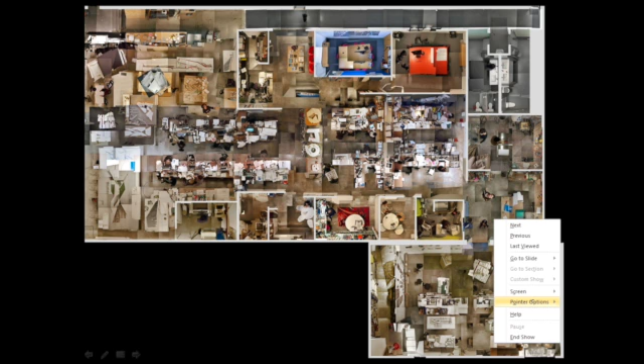This is a satellite photograph of the office. And the reason I show this image is because within the entire context of the office, housing exists thoroughly all through different parts of that office. It's completely intertwined. It's a major part of the work of the office.

And for the people in the office, including Teresa, who has been such a significant part of the ongoing work of the office, the office doesn't think about the work separately. We don't think of the work as a 'socially conscious' component, a term I've grown to hate because it makes it seem like all the other work we do is unconscionable. To us, it's all unequivocally and equally architecture.

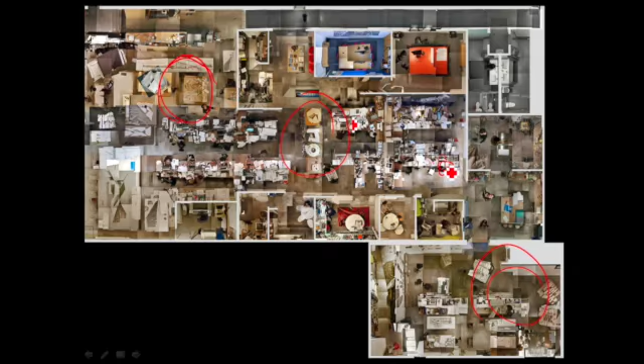This started in many ways with the first project for the office, which connected many of my original interests for architecture between education, arts, and most importantly, architecture's potential role in urbanism—in Los Angeles especially, where most people believe it is in many ways anti-urban.

This is a project for a school, Inner City Arts. You can see downtown here. This project, developed over many phases over the years, is first and foremost a nonprofit arts institution, a school that partners with LAUSD, the Unified School District, to take kids out of school as part of their normal school day and bring them to Skid Row to teach them art, because art has been taken out of most schools after Prop 13 passed in California.

This project, for me, was an important start to the office. Really, this was very much the first project. And it was important as well for context, not only for its program type—Skid Row District is an intense, inhospitable, relentless, and extremely unlikely place for architecture to exist.

In that way, I think one of the founding questions in the office and for myself was: could architecture exist in this context? And to challenge ourselves to see if architecture could in fact exist here. Because of the unlikeliness of this context, with few if any expectations on Skid Row—and this is an image of a street right around the corner from both Inner City Arts and the housing projects we've been doing—it felt possible to experiment, to push beyond the existing models for schools.

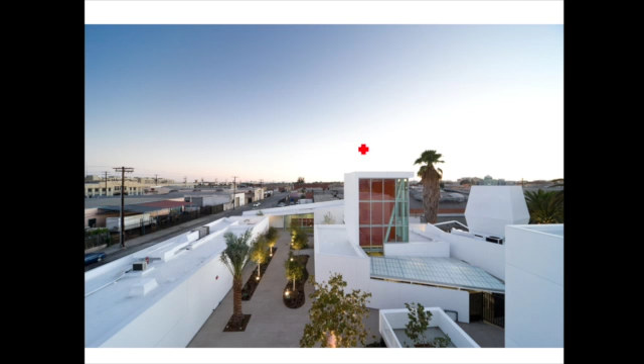The organization of the project is very much as the organization of a town. It tries to replicate many of the mechanisms of the city, the relationship between individual parts to a collective whole around a larger open space, trying to produce a sense of both individual identity and responsibility to the individual piece, but also a sense of responsibility to the collective whole.

In that way, architecture goes beyond an idea of pragmatism, but is very much meant to tell the story of how one might live in a more optimistic or progressive city. In that way, it is as much a teaching tool as it is an enclosure for the teaching.

The courtyard in that context is a new form, proposing really open, unprogrammed, but very much civic space between these different buildings. And these large roll-up doors open up, and the relationship between inside and outside becomes quite blurred.

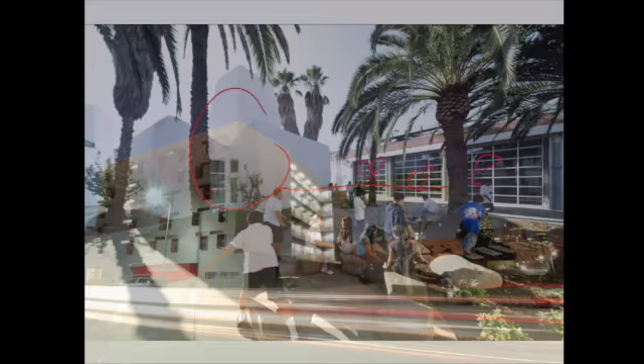Now, talking about the city during a housing lecture may seem a little bit off topic, but for me they're completely parallel. The entire reason we're invested in housing is because of its relationship and potential to transform and create real change in cities. And for me, the idea of the house and housing and its relationship to the city is inextricable.

Somebody who I've had a great deal of respect for, Yona Friedman, the utopian futurist thinker about architecture, wrote: 'When I was a schoolboy, I discovered that a house alone does not exist, that it does not end at the outer limits of the ground floor, but continues out onto the streets, the garden, then to the house across the street. The house across the street itself continues into what is in front of it, and so forth. To imagine one house is to imagine the whole world.' And by extension, I think, to imagine the city.

The first project we were involved in with the Housing Trust was Rainbow Apartments. That idea of the relationship between housing and the city was very much on my mind when we were contacted by them about 10 years ago, maybe 8 years ago. They were in the midst of evolving their model from an SRO type to permanent supportive housing, which was something they had never done before, and I had never done housing, so somehow they decided that was a perfect match.

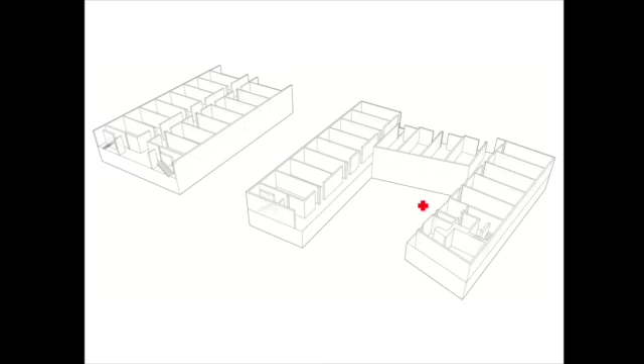But even more so, if there was invention in the project, it was at the scale of the collective of units. One of the biggest ambitions the Trust had for this project was to try to build a sense of community as a way of confronting and combating the isolation of many of the individuals that existed in the shelters.

This was something important we learned about the characteristics of the homeless in beginning to deal with this project: if you are homeless and on the streets so consistently, chronically, and in the public realm, constantly exposed and open in that city, you create this protective shell around yourself to produce some sense of yourself and some sense of protection from that world. Ironically, in a very intense way, the most public of those individuals became the most private in their psychological characteristics.

And for me that was important, because I'm not unrealistic about what architecture can do in the scheme of these very deep social and political problems. But I do think architecture can have real effect if it's targeted to specific problems that architecture can take on. One of them was to try to create a forum for reintroducing people to public interaction in a more safe or semi-public way.

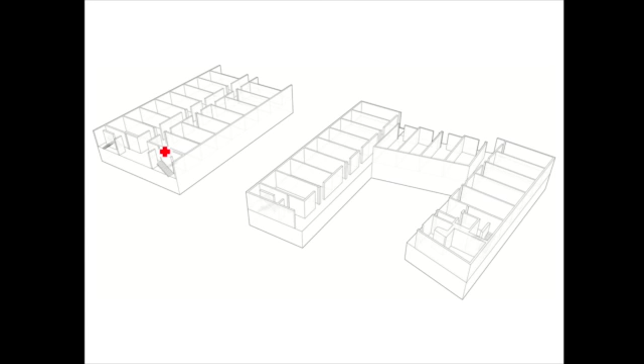That by itself is a spatial idea. The original model, the model of the SRO, was the double-loaded corridor, where people would come into the building, up the elevator, anonymously through the corridor and into their room, and you would never see them again. That model allowed people to continue to propagate this isolationism.

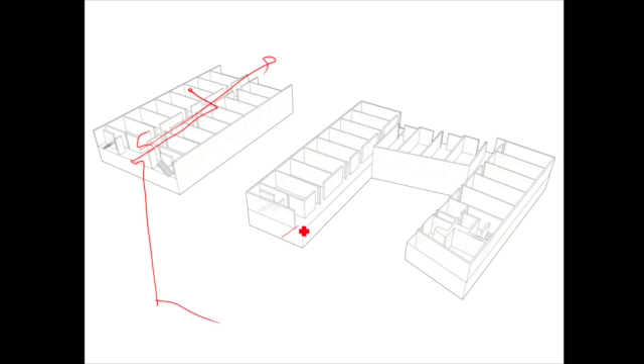What was at the core of what we were trying to do in Rainbow was to crack that model open, to create an interior space in which the tenants were in a sense forced into some level of more semi-public contact. We weren't going to dump people back out onto the street, but by cracking the box and creating a single-loaded corridor, people coming out of their unit just to go outside the building or to the kitchen would suddenly be in a space connected to this larger courtyard space.

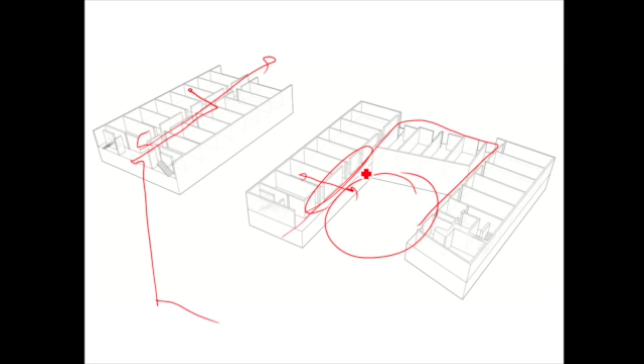That ongoing navigation and negotiation of this space for these individuals had the possibility to begin to give them the tools to navigate or renegotiate their relationship with what eventually is the outside world. That idea is a spatial idea.

It's very much an architectural idea. The project is organized as a 6-story building, very typical of the models of pretty much all of the projects we've done, because they have to be built with similar financial and funding mechanisms to typical developer housing in a place like Los Angeles: one floor of concrete podium, then 5 floors of stick-built or wood-built construction above. The podium became a real opportunity for us, and I'll talk about that in a minute.

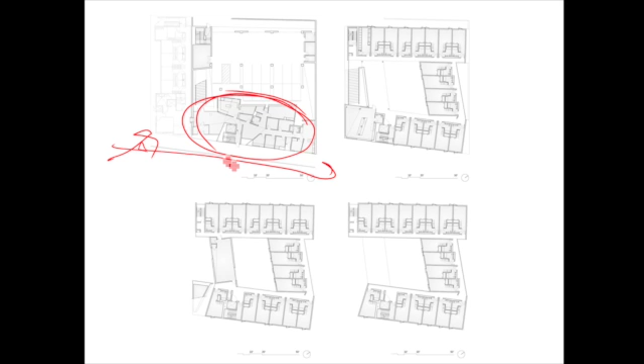In the first floor of the project, this is the main street, San Pedro. The front part of the project, which was the entry and then stairs up to the upper courtyard, had all of the social services in a series of offices very much on the front of the building. Unfortunately, because this building was still being built in Los Angeles, we had to provide an enormous amount of parking under that deck.

Once you came up the stairs to the courtyard, you began to be surrounded by the housing units that ran all the way up through, but there were important public or semi-public components organized around that courtyard. One was the laundry room right at the top of the stairs, which was the destination, the common democratic destination for everybody in the building.

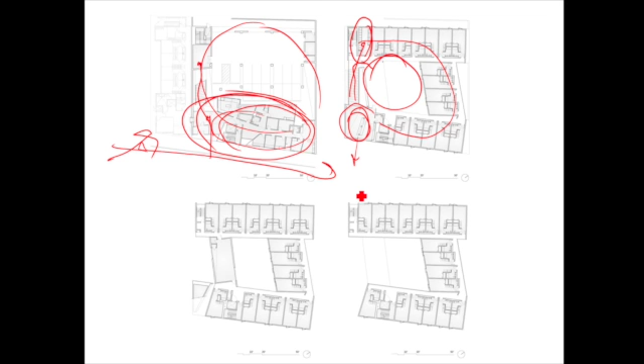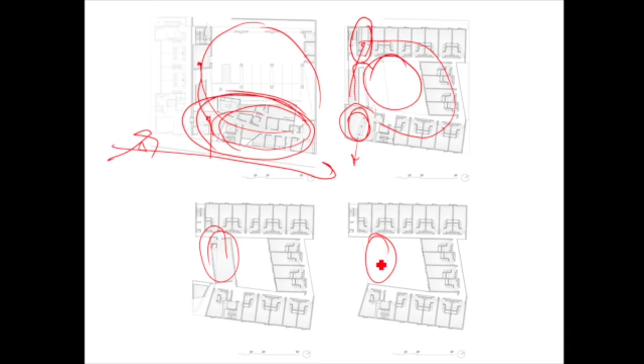The community kitchen was out on the other corner with views out over the street. And then on the next floor up, a bridge structure, which was the common meeting room for the community. That bridge up above had an outdoor deck where you could be even further up into the courtyard space.

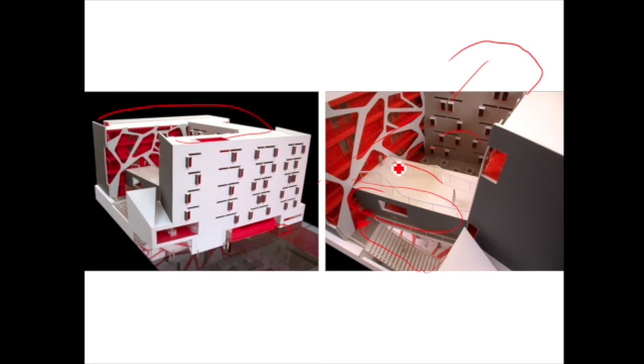You see the original models of the project: the outside space, the U-shape of the courtyard itself, the stairs up, the single-loaded corridor that then wraps around the back. Some of the units look into the courtyard, some look back to different directions, east and west in the city, and then the courtyard, the bridge structure up above, and that outdoor space on top of the bridge.

The laundry room was here as you came up the stairs, and the bridge, which spans across the whole courtyard, starts to create a shadier space underneath the building. But it's really about the linkage or pivot of those different social spaces that was important to me.

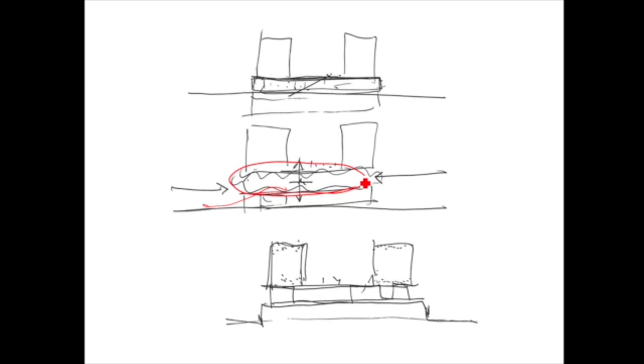I mentioned that all of these buildings are on one floor of podium, and that's something that became characteristic in all of the buildings: how do you navigate up through the building to this new semi-public space? It's not on the ground floor, it's not all the way at the top, but it's really that first level up. It's a space that is not far from the street, but is connected more to this interior space of the courtyard.

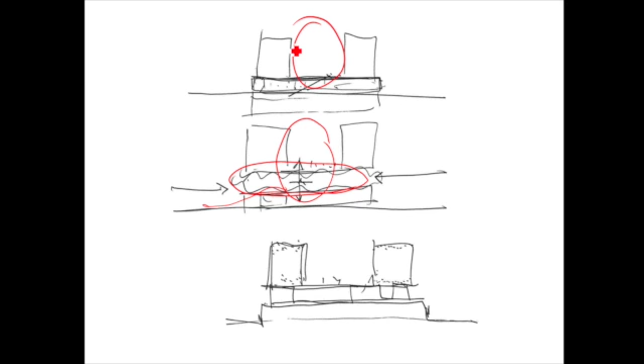The way that space has evolved in all of the projects I'll show tonight is probably one of the places where the greatest amount of exploration and hopefully invention has taken place. The outdoor courtyard space has very much been taken over by the community.

It's not just a place to see across and to see the other individuals in that community, but has been embraced very much as a social space, a party space, a lecture space, a barbecue space, and increasingly a garden space.

The courtyard, which was very much a hardscape for obvious financial reasons, has increasingly been filled in by a series of large-scale planter boxes that have been retrofitted into the building, in which the community begins to grow. The idea being that that space is the heart of this community.

Each of the units is absolutely identical, and this was part of the program. There was a sense that while there would be a collective space, one of the other parts of this, the democratization of this community, would be that every unit was exactly the same. The only difference really being the window placements, which begin to shift back and forth, creating a sense not only of difference in the unit, but also very much a level of individuality on the exterior facade.

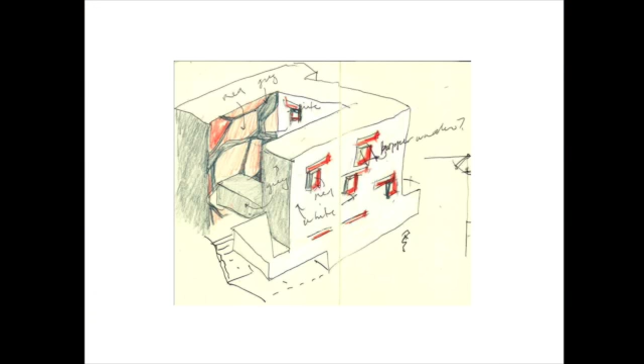I mentioned the courtyard and the financial issues on the courtyard, and the reality is that financial issues of any architectural project begin to have enormous impact within these projects, and this project was no different. One of the issues was that this project was designed, and because of the funding mechanisms, had to be completely budgeted very early on, even well before we were finished with complete design.

And the problem was that over time the economy took off. It was one of the periods of greatest run-up in the economy. So while we budgeted and funded the project in one economy, construction prices continued to go crazy. The inflation was intense, and you couldn't keep up with it in any architectural project. It was almost like we designed the project in one economy and then tried to build it in a completely different economy. Because of that, and because the costs and prices of building materials were changing all the way through the process, it was a construction process of constant value engineering.

Value engineering, or really taking things out of the building. One of the things that got lost was a series of screens that created some level of separation between those walkways and the courtyard, some level of intimacy, but also a scale of screen that was both at the scale of the individual and the courtyard. It was trying to be that in-between facade, really a communal or civic or city-scaled facade that we weren't able to hold on to in the project.

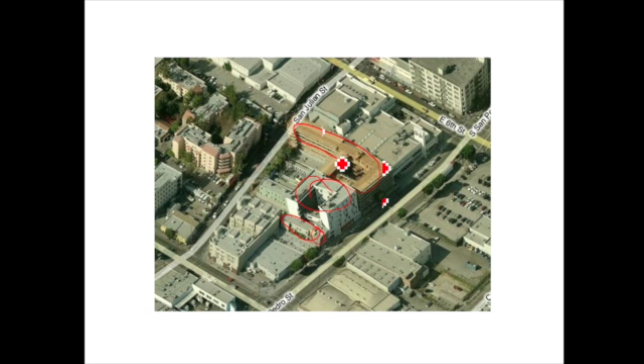There were, as I mentioned, Skid Row had built another project here. After Rainbow, and this is the only Google image I could find, this project is now done, which was the Abbey Apartments by Koning Eizenberg, all built in a row, and then there are other social services, the Midnight Mission Drop-In Center. One of the things that I began to realize, and I think was very much on Skid Row's mind, was that their success could potentially be their urban downfall.

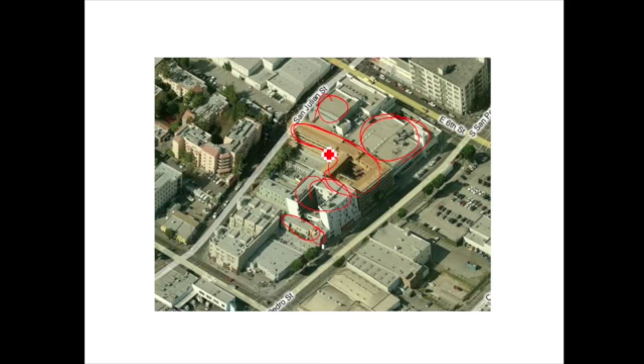That by creating so many successful projects, by propagating a density of these kinds of housing projects, that they were in danger of recreating the monoculture of the large, enormous projects that I showed earlier on that were built in the post-war period. That any individual project could be seen as quite successful and intimate, but taken as a whole, you're completely changing the dynamic of the neighborhood.

Because of that, Skid Row began to look for the possibility of moving their project to other parts of the city, to expand this question of where affordable housing, housing for the homeless, should be in other parts of the city. They found a site that nobody else wanted, next to the 10 freeway, proximate to downtown, but also extremely proximate to the convention center, Staples Center where the Lakers play, and now this large entertainment development called LA Live.

This project for Carver was a little bit larger. It's 98 units with an emphasis more on elderly, formerly homeless elderly individuals. It was an incredibly challenging site, very small for 98 units. In fact, it seemed like it was going to be impossible to fit those units in. It was oddly shaped, kind of a half or a quarter crescent shape.

But the biggest issue was the proximity to the highway. It created enormous problems of acoustics, especially for tenants immediately adjacent to the highway. The quality of the air could potentially be a problem. And in some ways, the visibility of the project was very much a question as well.

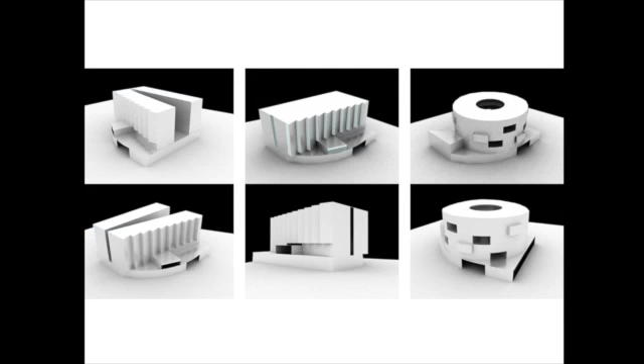I learned a lot from Rainbow, as I mentioned. Some of it was just in the approach to the way that you would begin to strategize and think about the project.

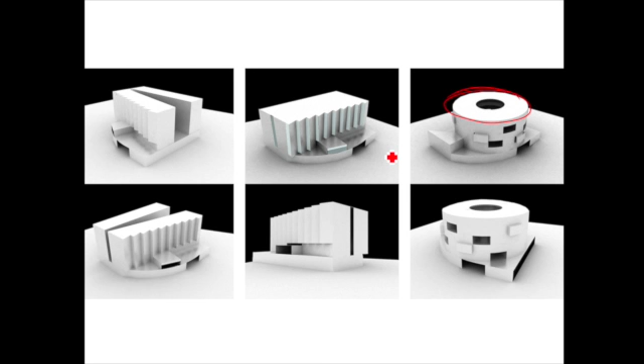As I mentioned, the site was quite unusual, and we tried many different configurations before settling on this circular form for the project, which was a lot unusual for a housing project, but it had some very strong attributes. What we realized was that the circular form provided the maximum amount of floor area to the minimal amount of circumference, and since we're always dealing with the cost of surface area in relationship to floor area, that was an interesting beginning to the project.

The second thing was that it created the smallest amount of surface area in proximity to the highway and the noise generation. The physical properties of acoustics mean that every foot you get away from the noise source, you get a significant drop in the decibel level. That was important because we knew the cost of trying to mitigate the acoustics was going to be an enormous cost of the entire project.

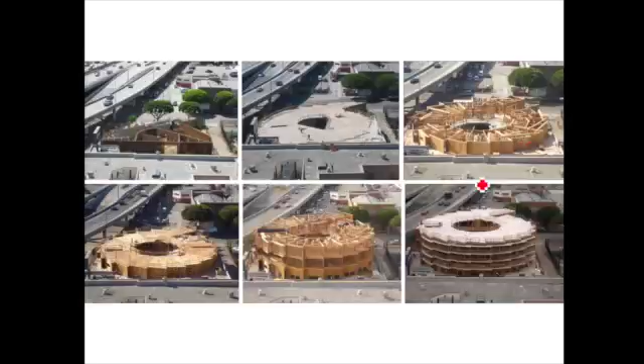This just gives you a sense of the construction as it started to move up, the stick building of the building, the circular form of the project, the interior courtyard that was the result of that, the donut at the middle of the space, and the lower level, which I'll talk about.

One of the other characteristics of the project was that this round shape made the building start to feel like it was in motion as well. Given that so much of people's apprehension of this project was going to be in motion from passing cars, I was fascinated by the idea that the building could be in a kind of choreographed dance with those people as they drove by. That was one way of beginning to capture some sense of relationship—that if the building felt like it was in motion with you visually as you moved around it, you couldn't help but feel like you were in some kind of romantic dance with the building and the inhabitants in the dance.

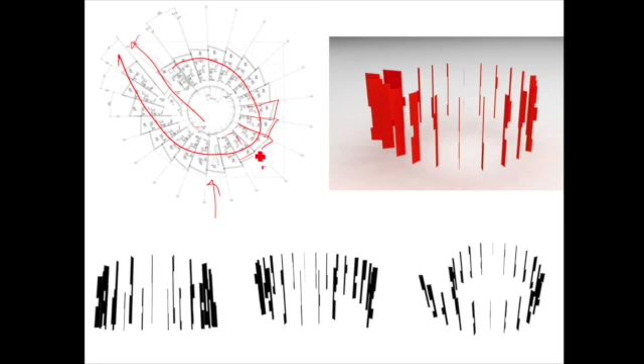We did many different studies of the way we would create a type of staccato nature. You can see in the plan that the form begins to fan out. It allowed for some openings in the building, but this slightly serrated facade also had great advantages in terms of actually building the building—it was a series of straight segments. It had added advantages acoustically, but it also began to create small indications of the individual unit within the collective facade. That idea of the individual in relationship to the larger whole has been an exploration both in the form and the facades of all of our work.

And here it is going by. It's going to happen a few times, so hopefully you get it. That's about as fast as you ever go by—very often people are in a more ongoing relationship with each other because they're not moving so quickly.

The ground floor is very different in its form and plan from the rest of the building, the tenant floors, the apartment floors. Here I was trying to create a space, or a series of spaces, that could almost be seen, both from inside and outside, as an extension of one of the characteristics of this place, which is the underneath of the highway.

While the highway up above defines very much the upper circular form of the building, I'm just as fascinated by the underneath of the highway. It's a kind of space which tends to be unused, but is also very characteristic of Los Angeles, and increasingly, I think, needs to be one of the characteristics of infrastructure that begins to change. This project aspired not necessarily to revamp that space—that was outside our scope—but maybe to give indications of the way something at the scale of infrastructure could relate to something at the scale of a unit of the city, whether housing or any other project type.

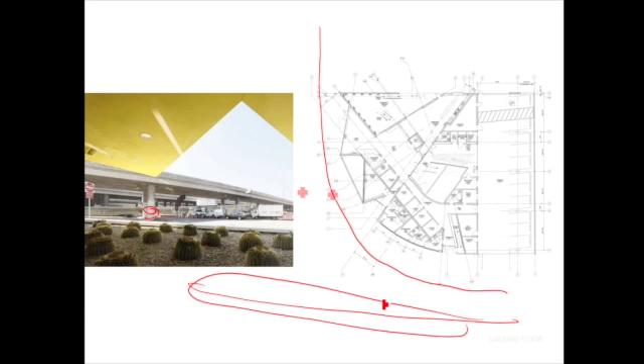Hope Street comes along and bends in this direction. The highway is right here, and underneath the highway is right here. This view on the left is taken from the community room out towards the highway.

But there's a series of almost boulevards or avenues, spatial extensions that connect the alley to all of these streets visually, as well as being accessible physically. So while the building very often isn't open, it's a secure building, there's a sense that as you move through these spaces, which also include the community rooms, the community kitchen, the main office, this meeting room, and resident managers' apartments, you're constantly given a sense of visual trajectories deep into the city.

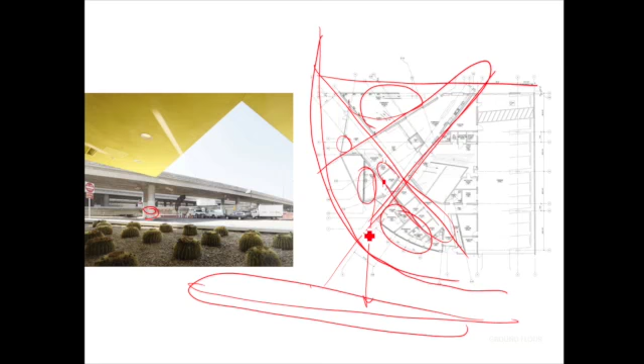So from that ground floor, there's a sense that the building is very much connected with continuity to the underneath of the highway, the continuity of Hope Street, all the way out to the alley, and the extension of Hope Street on this side.

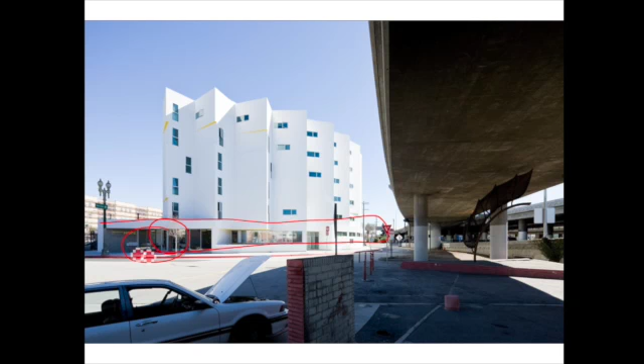The building, which you saw from above, from the highway, is also meant to be seen from this lower space. That extension visually where you see the entry, that entire concrete side of the building is at this level. You can begin to get a sense here that the highway, which very much right now divides two sides of the city, has the potential to actually connect two sides of the city.

I think buildings like this, and siting buildings like this, with this kind of visibility, have also the role of indicating that these thresholds or seams that have tended to divide the city are also very visible. In the same way that the community that exists in this building was once anonymous and now is much more visible, these urban conditions need to be made significantly more visible as well.

In the inside of the building, the inner courtyard is a very important space, as it was in Rainbow, but in this case it's much smaller. The scale of the space is much tighter, although events do often happen here.

From the lobby, there's a large staircase at the center of this internal courtyard, and its intention is not just to take you up to the primary second floor, but is also meant to be a place to be, a place to sit, a place to have conversations, a small amphitheater for the community to meet when there are meetings about what's going on in the building as a whole.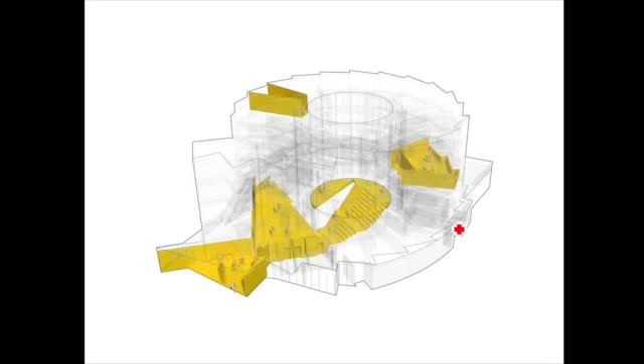In that way, it's not a flat courtyard, but a stepped and very much occupiable series of stairs. As opposed to Rainbow, where most of the social services were all on one floor, here I was trying to change that model and begin to spiral those different spaces up through the building, so that the section of the building drew people up through into the individual units.

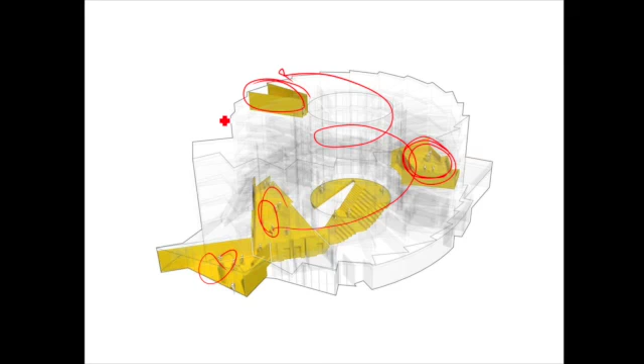So it was an experiment to see if these social spaces - the community kitchen, the entry, the laundry room, the meeting and TV room, the smoking porch out towards the city - were opportunities to quite literally draw individuals up through the building, as opposed to allowing or hoping that semi-public space would work by having it all on one floor.

The inside of the courtyard, as I mentioned, was quite tight. One of the things we learned from Rainbow, and when we lost the screen on the inside of the courtyard, was that these elements have to be more fundamental to the building. One of the ways of doing that is that no individual architectural unit can only do one thing.

No individual architectural component can be a monoculture in and of itself. It has to do multiple duty.

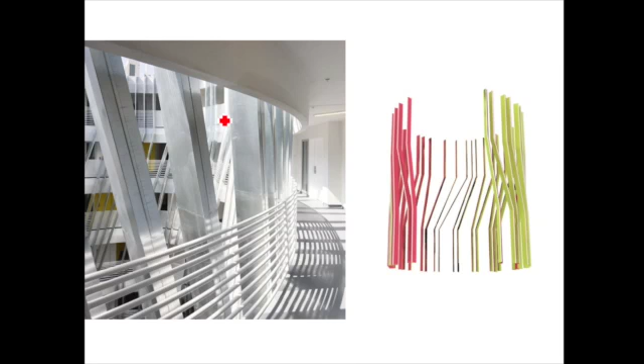I was very concerned because of the tightness of the courtyard that the visibility across would be too exposing for the community. So what we started to do was imagine a series of vertical fins, almost like the blinders that a horse wears, where you can see directly across. As you move around circularly around the courtyard, the farthest dimension is always the thing that's very visible, but as you look through your peripheral vision, it becomes more closed and opaque. So it has an inverse relationship to that movement.

But the fins have to do a number of other things - they become primary structure for the balconies.

We're hanging all of these balconies off of tension rods that are inside these fin enclosures, which is a very efficient way to hang the balconies.

Secondly, all of the roof drains migrated out to this interior perimeter, so they drop down through the building. There was also some methane on the site, typical in Los Angeles, which needed a series of methane vents up through the building. By pulling them into the courtyard, we didn't have to navigate them up through the walls of the units, which is very expensive and a problem.

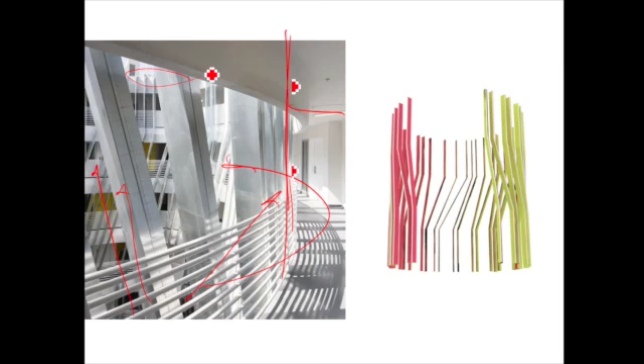It also gave us a way of starting to create a very pragmatic texture on the building, and cladding all of those necessary items became a way of reinforcing the architecture and its use in terms of the social and visual dynamic inside the building.

Here you see that interior space and the fins in the building. There are two primary stairs here and here, which are open to the outside, so as you move up through the building you're really in a way outside of it. The elevators are here as well.

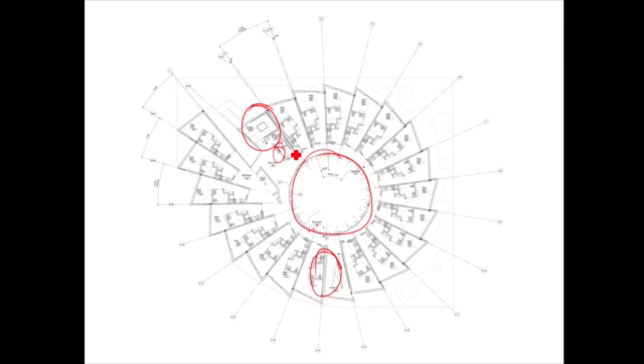These are images of the units. The units changed quite significantly. Is that in focus? Can you see that? It seems a little off, maybe up there.

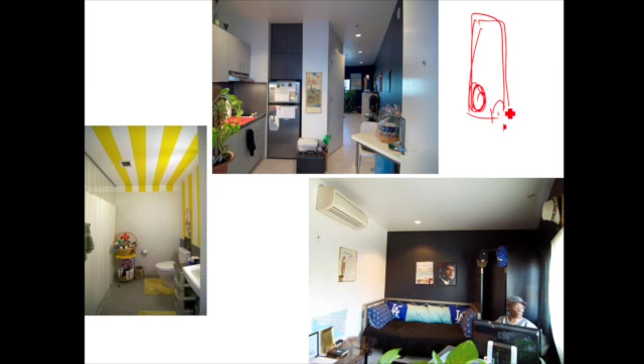We changed these units quite a bit from Rainbow. In Rainbow, it was a unit with the small kitchen and bathroom all at one end, and you entered directly into the space of the unit itself. At Carver, they're quite different, where the bathroom migrates to the middle of that space and the kitchen is in the front.

That did a couple of things. It allowed us to create a much larger facade, which meant we could get a window and a door on both sides of the unit for flow-through ventilation. It also meant the kitchens were right off of that courtyard, so as people were working in their kitchens, they were part of that social space just outside their window.

You can see the kitchen here, the bathroom entered through here, and then the efficiency unit, which includes a table and chair, a bed, and a lounge chair. This is one of the tenants' bathrooms.

Everybody, because it is permanent housing, very much transforms their unit. Some of them have serious decorating skills. Some of them have a different sense of how they decorate their units.

An important part of the courtyard was also to frame this idea of the vertical, to use it as a real attribute. That interior space creates a space away from the intense acoustic environment of the highway, but it also begins to give you a sense of vertical expansion, so that in that collective space, the sense of openness and extension toward the sky is part of the optimism and identity of the building.

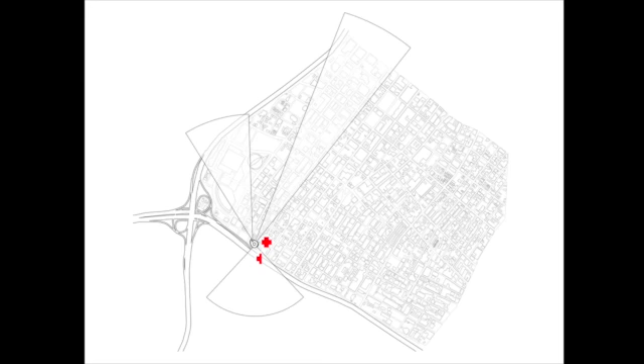I mentioned those individual spaces that spiral up through the building, and that the building acts as a kind of compass. The community room and laundry room were grouped together for the first time, so those two activities could really merge.

That space is at the third floor of the building, which puts it directly at the same level as the highway. It is the Carver Apartments' front porch to this larger social space of the city.

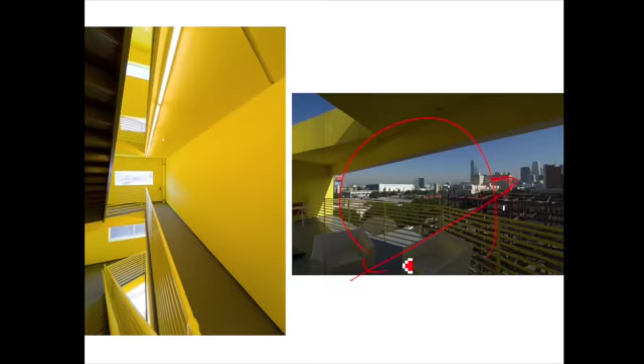As you move up through the stairs, you connect to other spaces, including this larger porch, which has a phenomenal view of downtown. To make downtown and its iconography a partner with the building, we were trying to find, in any place we could, even the most incidental of spaces, ways of creating useful and social space for the community as well.

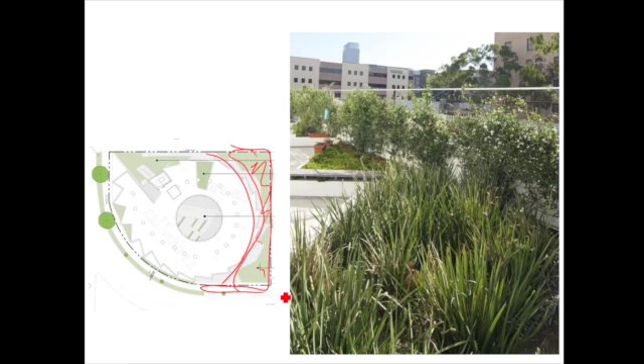As I mentioned before, if this project is going to have an influence on urban thinking, it's partially in the way it engages the city in and of itself, but also has to begin to deal with, or has the possibility of dealing with, the idea of infrastructure as something so defining in the city.

While this hasn't completely come to fruition, one of our ways of thinking about this is to begin to ask what it would take to use not so much Skid Row as the organizing district for these kinds of projects, but to take on other more characteristic components of the city, like infrastructure, like the highway, and look for sites that other businesses, individuals, and developers wouldn't necessarily look for. Because of the inventive quality of these projects, you could imagine them as real places to build housing in an ongoing way, transforming one of those important urbanistic characteristics of the city.

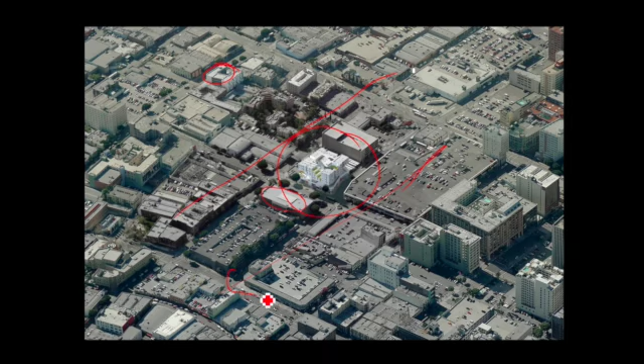There were a number of new challenges posed by Star that are different than Rainbow and Carver. One of the things the Housing Trust was very much looking at, in conversation with us, was how to take this problem of creating these projects as more individual or siloized, and connect them to a broader, more ongoing and sustainable idea of the city.

One of the ways of doing that was to potentially create a project that would be mixed use, adding other components beyond just housing. The Housing Trust was very interested in potentially doing a retail project. But there's a problem with that, primarily to do with their funding—if you're in the housing business, you're not really supposed to be in the retail business, and it starts to create a series of impediments for funding.

But there is—and I'm paraphrasing the way they've gone about it, they'd probably not be happy with how I'm describing it—a loophole that exists in some of the housing codes, which says that if you have an existing retail use on the site, you can keep that retail use going. So the Housing Trust went out and started to look for full-site retail buildings.

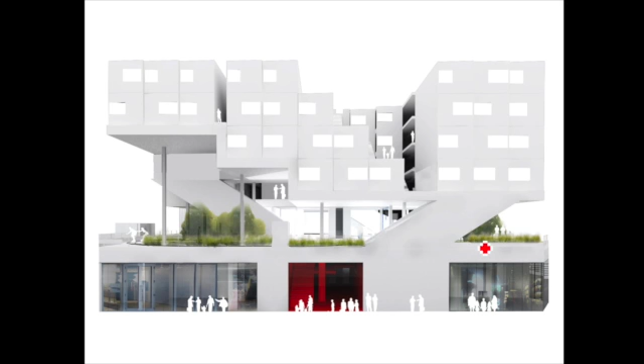I can't describe what a radical idea that is in a city like Los Angeles, as it would be in many emerging or contemporary cities—the idea that you would value a building just because it exists, and try to transform that building and put effort into transforming it. It's interesting because it's saying that density as an emerging reality in Los Angeles is an important characteristic of thinking about the development of the city and these projects, as opposed to removing existing density, to begin to work with that and enhance it.

The reality is that by working with this existing building, it presents a series of pragmatic challenges, which include having to keep the retail businesses open for as long as possible and not interfere with them as much as possible. And because the building occupies the entire footprint, staging the construction is also a very complex problem.

We began to look at what other possibilities existed in thinking about building the building, and we got very interested in multifamily prefabrication as a way of thinking about this project. That also is a new idea.

In Los Angeles County, while you're able to do prefabrication for single-family houses, where it's arguable whether it's really of economic use, you're not allowed to do multifamily prefabrication. It's a bit arcane, but it primarily has to do with the fact that a prefabricated unit used in multiple instances is considered a product. Any product that is part of a building in Los Angeles has to have a research report, which is our equivalent of a UL listing. And none of the prefabrication companies want to go through the process of listing their buildings for an unknown building climate or potential constituency.

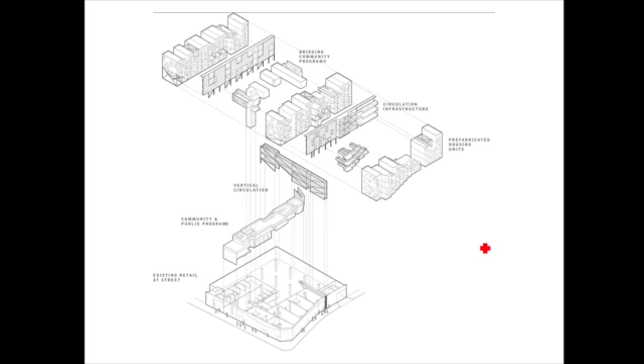So another part of our project was to work with multiple prefabrication fabricators to actually design their brochures so that these units were included in their brochures. The thoroughness of having to take these iterative steps was very much part of what we've come to believe architecture is—not only a building discipline, but a strategic discipline.

This is the way the project will be built. The deck that exists is remaining—we're going to use that, but we're actually suspending a new concrete deck above it, which spans the entire site, becoming a tray for the prefabrication to drop on top of. This has to do with structural reasons, because we're in a seismic zone, and dealing with the prefabricated unit and collecting the forces and dragging them down to the ground is another one of the complexities.

These are stacking diagrams—they stack 4 units a day. What's interesting is the advantage in the prefabrication: it allows for the staging, and it allows the businesses to stay open for an extraordinary period of time. We're really missing the majority of their retail units by needling the structure down through. It doesn't mean it won't be loud, but we'll be missing their actual units.

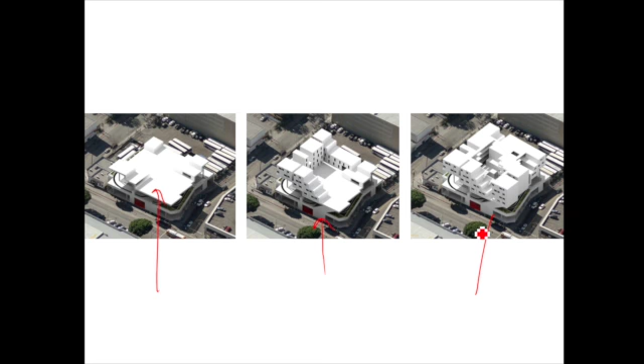The prefabricated model allows for these projects, the units, to be built in a factory, which means the quality control is much higher, which means the trust as well as the individuals will have units that last and be maintenance-free much longer. That kind of cost is something we're just beginning to quantify, but it's something that will be quantified over the life cycle of the project.

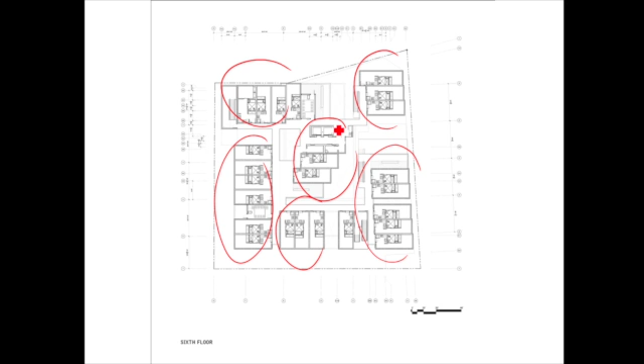Each of those stacks of units begin to be stacked into smaller, almost building-like clusters, so the units are not just around the perimeter but all the way through the full site, and these individual clusters act like small buildings in a larger village. It has the advantage of creating a series of views and light and air deeply into the block, and means we can use the entire block efficiently without going beyond 5 or 6 stories, which is economical in these kinds of buildings.

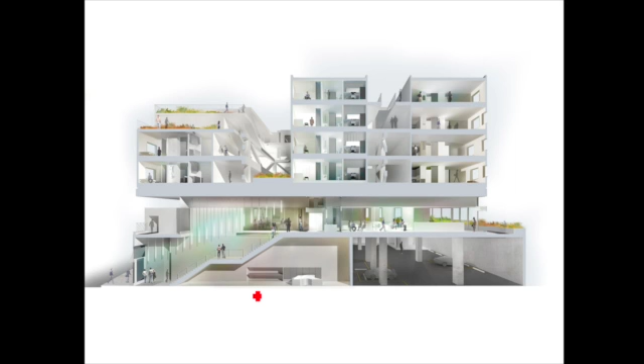This project is also changing the model significantly for the trust, because in the past the social services were really only for the tenants in the building. In this building, they're looking at expanding the social services so there'll be service providers for other buildings that don't have social services in the neighborhood, so this starts to become more of a center of a much larger community. Most of those services are on the ground floor and a mezzanine floor.

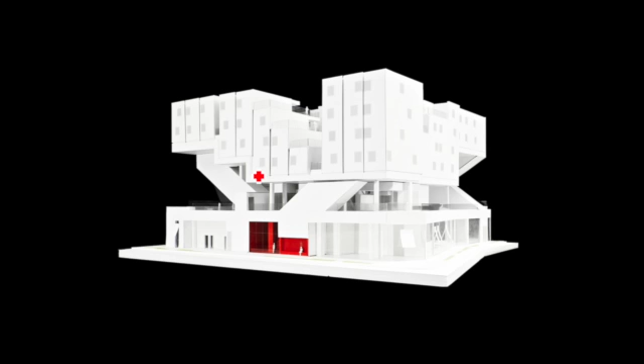Here you see some of the parking behind, because in this case we do need it for retail. The units up above, and then this in-between space. That in-between space, created horizontally between the existing building and the new units, is for us in this project the equivalent of what the courtyard was before. Not a vertical space so much, but now a horizontal space that connects, because you're raised up a bit, out to the city as a whole.

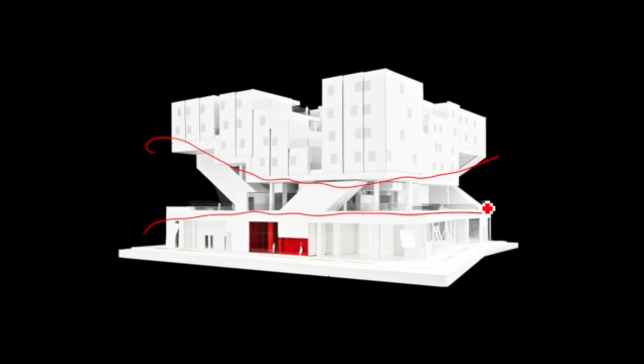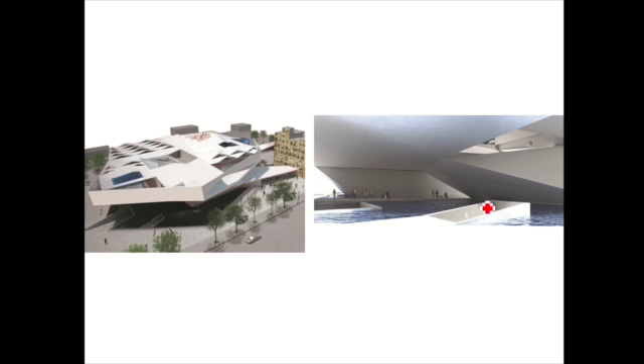In the first project I showed, Rainbow Apartments, the courtyard was a more enclosed space, more removed from the city. In this project, you are both removed in a pragmatic way, but in a more consequential relationship with the city around it. And this has a little bit to do with some of the thinking about making public and semi-public social space in cities like Los Angeles.

In this case, a project for a museum in Fresno had similar characteristics, where the city is not mass dense, or doesn't have the same kind of mass density you might expect in a city like New York, or even to a certain extent Boston, Chicago, Paris, London, but is a type of city which is much more open, much more porous.

In this project, we were trying to create the public plaza by creating the kind of compression that you normally have in a courtyard vertically as opposed to horizontally.

We've explored that in a number of installations, including one called The Dark Side of the Moon at SCI-Arc, which took these two surfaces and explored what kind of connected or communal space could be created for events in between. This was an early diagram I was doing where this model doesn't really exist.

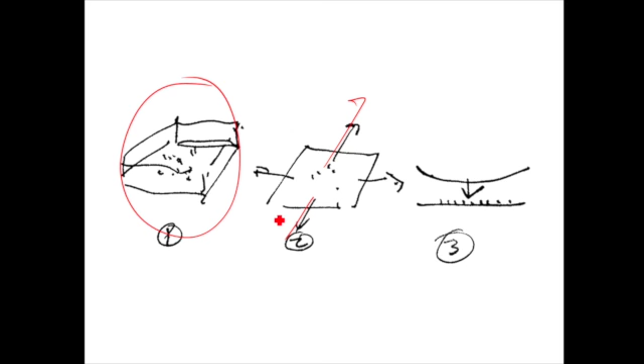This model of creating those spaces doesn't exist in a place like Los Angeles, where the compression that normally exists begins to peter out from the perimeter. And maybe this model is one that could be looked at in a building.

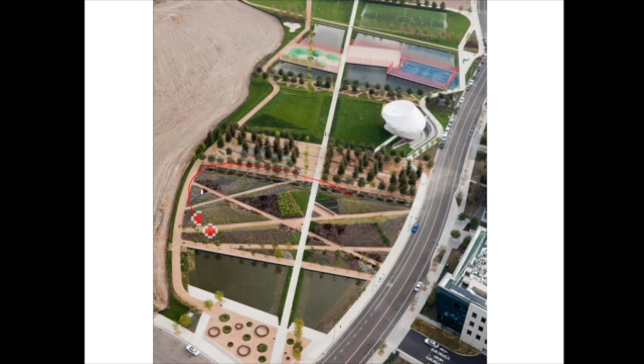Another project that has been a real influence on that in-between space at the Star Apartments is Playa Vista Park, which we just recently finished, which is our first landscape project. Here we were trying to recreate in a park space by developing a series of specific activity spaces, activity bands aligned with each other.

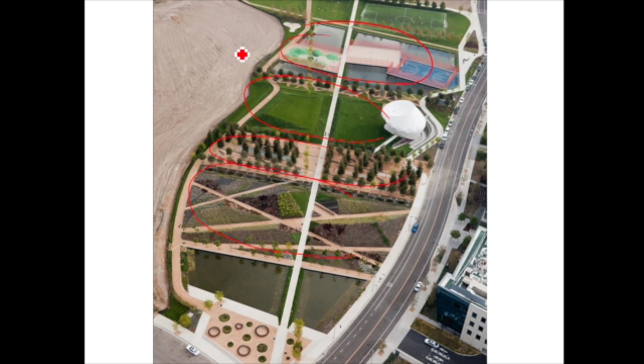An equivalent to that siloization that often takes place in a city like Los Angeles, but developed in a different way, a kind of bento box of activities for the city, where you could begin to imagine those activities, while parallel or adjacent to each other, beginning to spill over, creating a new dynamic for an intense and dense social space. The ground floor plan of the Star Apartments is very much that.

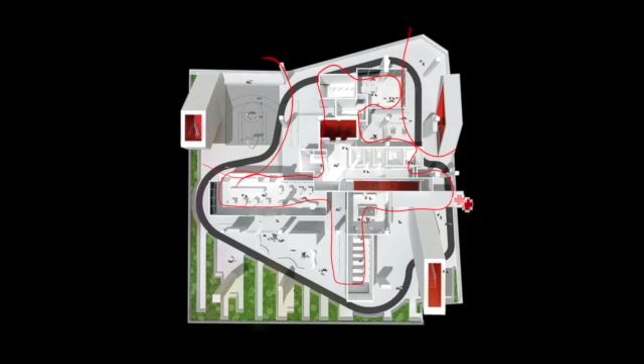The social and communal spaces are a series of indoor spaces which feather out or finger out towards the perimeter, and that begins to create a whole series of outdoor spaces that are defined by that ceiling, the floor, but also very much by their programs.

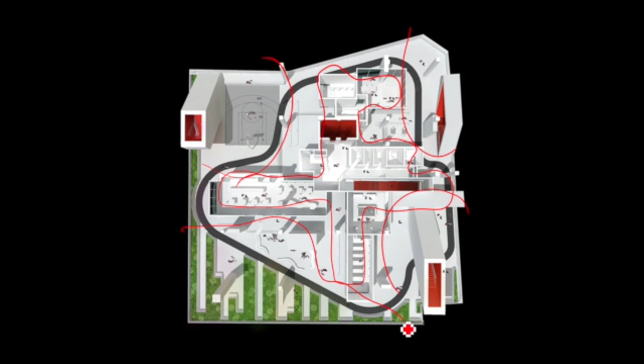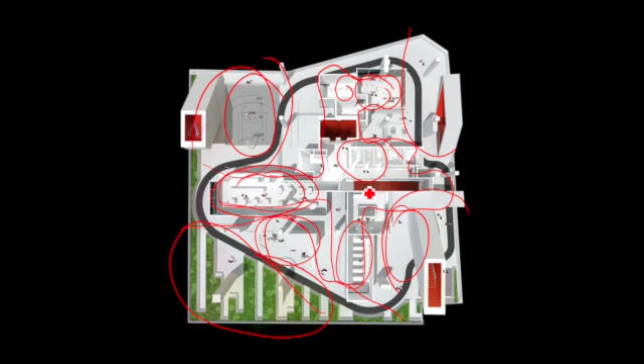Many of these spaces are, for the first time really, physical activity spaces on the exterior: a walking track, yoga spaces, outdoor meeting community spaces, a basketball court, and horticultural growing and gardening spaces that face south of the building. There's a community kitchen at the center, an art room, a technology and digital computer room, meeting rooms, a laundry room, all through the building, creating this relationship between those common spaces and the outdoor spaces.

Over time, I think cities have begun to put more and more emphasis and hope that cities will be transformed urbanistically by large-scale, very often privately developed spaces. That's certainly the case with the Convention Center and LA Live, which by their sheer scale have the gravitational force to begin to transform even cities as large as Los Angeles. They're instantaneous changes in the city.

And I think in that way, potentially unsustainable, both in their scale and also in their type, because they tend to be, for the most part, privatized projects in which their perimeter, which seems very often to be permeable and social and public, is still very much a private facade, a private fence around that space.

And because they're also instantaneous projects, they have the quality of being an alien in the city. Because they are instantaneous projects, I think there's a real question whether their longevity will be instantaneous as well.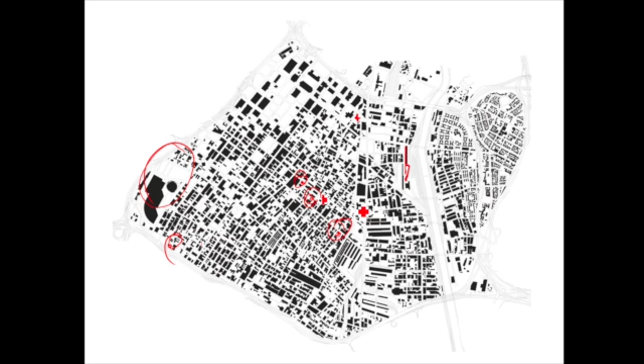In projects like Skid Row, while Rainbow and the Star Apartments, Carver Apartments, Inner City Arts, and some of the other projects we've created are removed from each other and are quite small as individual increments in the city, as a project as a whole you can begin to imagine that a new network map starts to get created across the city.

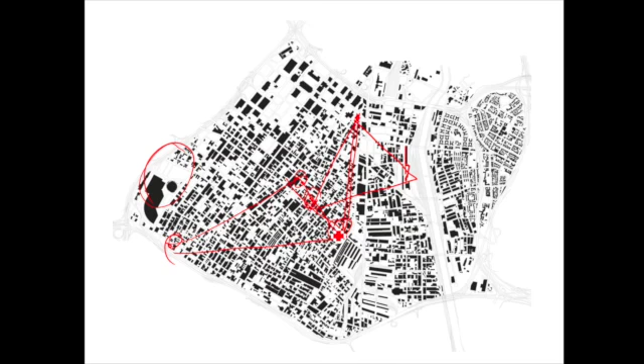Especially as people begin to understand and recognize them iconographically through their identity as important social and civic structures within the city, your mental map begins to change in terms of these projects, and they begin to have very productive, over time, realistic abilities to change that map.

That sense of the city, but also through their accumulation, that network begins to have iteratively a scale which actually far outstrips the individual and developer-based commercial projects.

And I think that is important in terms of our overall goal between the relationship of housing, architecture, and the city. That if we concentrate, or even though we might concentrate on a single project, it's important to understand the combined and cumulative effect of these, both for the positive and also at times for the negative.

That effect can and should be large, and the responsibility of architecture and of housing advocates, of developers, politicians, and funders is to realize the profound and important impact these projects have, not just on the lives of the building's individuals and inhabitants, but also, importantly, on the life and the future of the city itself.